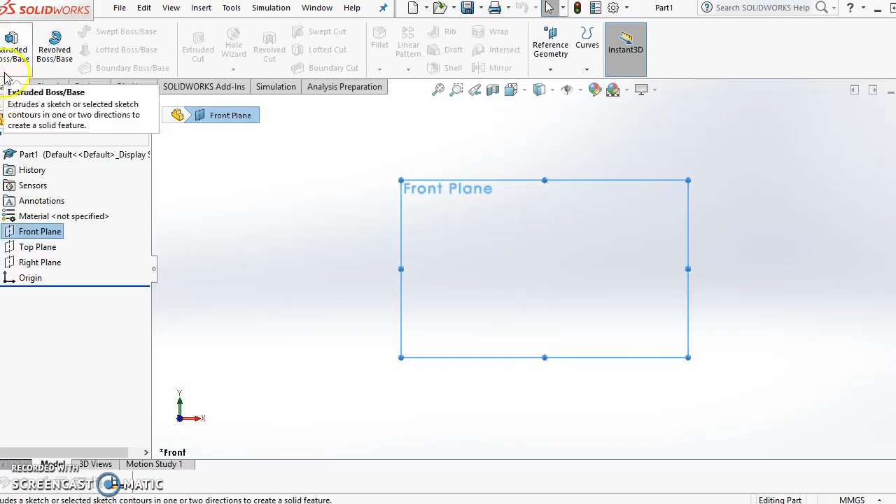Alright, so from this window we can just go straight into the front view. All the work we'll be doing in this tutorial will be using either the Features tab up in this top left corner or the Sketches. So both of those tabs we'll be using.

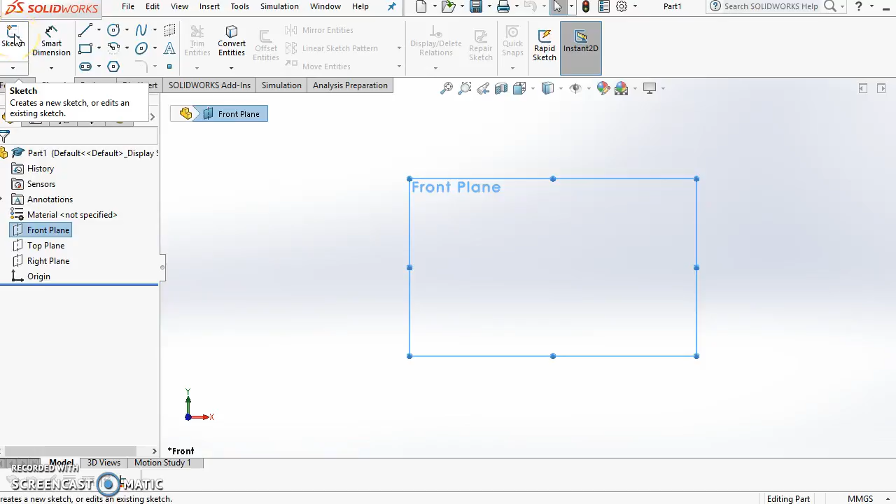So to start off with, just select the Sketch tab and then click on the sketch icon. And we're going to start off drawing a rectangle. So click on the rectangle and point your pencil in the middle there, and then we can just sketch a rectangle. It doesn't matter of the size at this stage, and let it go.

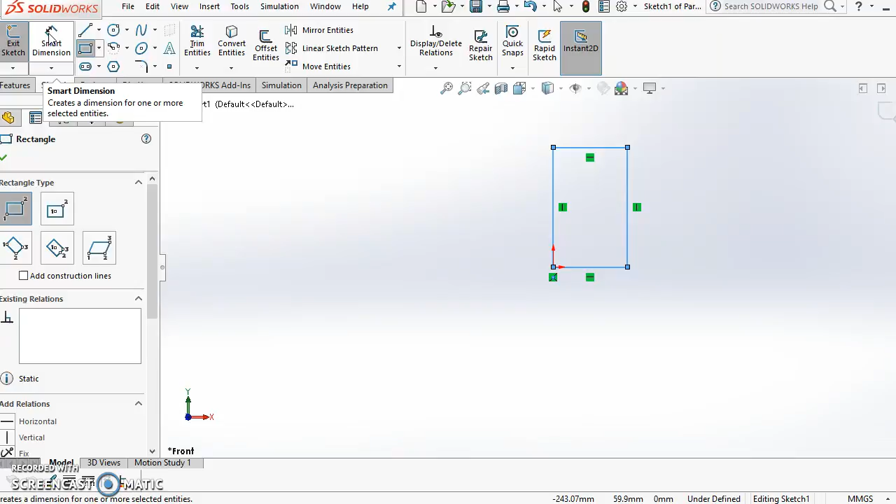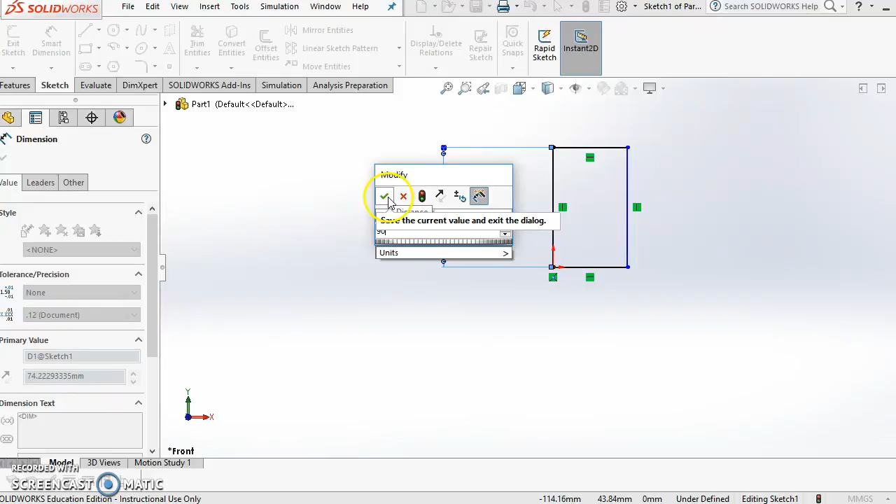And now if I select the Smart Dimension and start adding some dimensions for the sides. So first off, once that side is on orange color, I'm just going to click on it, and then I can just drag it out, click again, and this dimension here from our tutorial is 90. I'll put in 90, and I can either click enter or click on the green button, tick.

And same process again on this side. I just click on the line, drag it down, click again, and this dimension is 38, and enter.

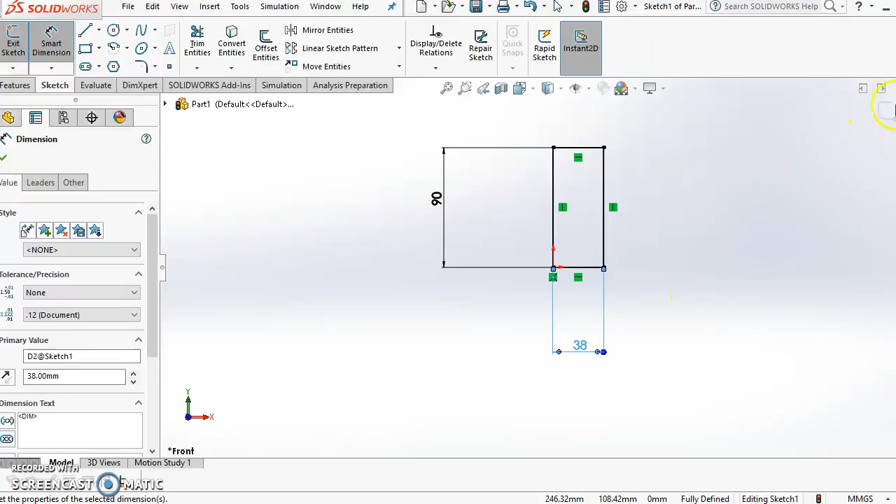Okay, so there's a little icon on the right over here. Just click on that to confirm. And if you want to have an up-close look of your rectangle, if you click on this icon here, zoom to fit, there's our rectangle to start off with.

Okay, so from the Features tab, what we're going to do is just extrude a little bit of it. So click on this extrude, and by default, if we have a look in this window here, it's set to 10 millimeters.

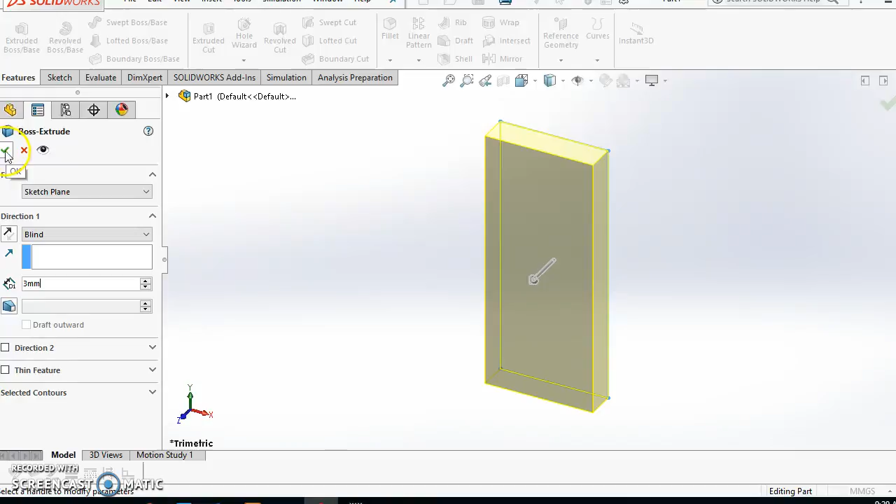Now from our workbook tutorial, it's 3 millimeters. So if I just put 3 in there, and by default I know this is set to millimeters, but you can just select down on the units and select millimeters, and up in here there's a little tick box, so I'll just tick that, and if I just tick anywhere on here, you'll see that now I've got a 3 millimeter extruded side there.

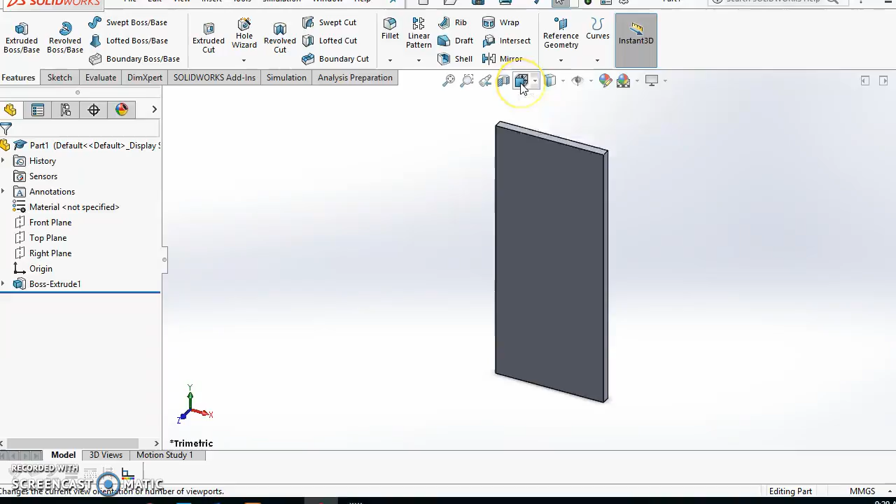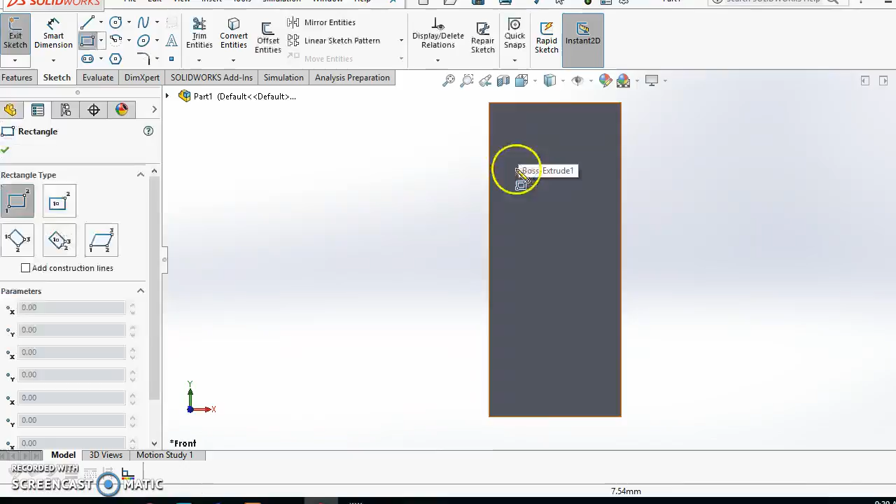Okay, so the next stage is from our view orientation and selecting the front view, and going and selecting the sketch again. We're going to create the window. So sketch, rectangle again, and inside this rectangle I'm just going to draw another rectangle. Doesn't matter of the size at this stage.

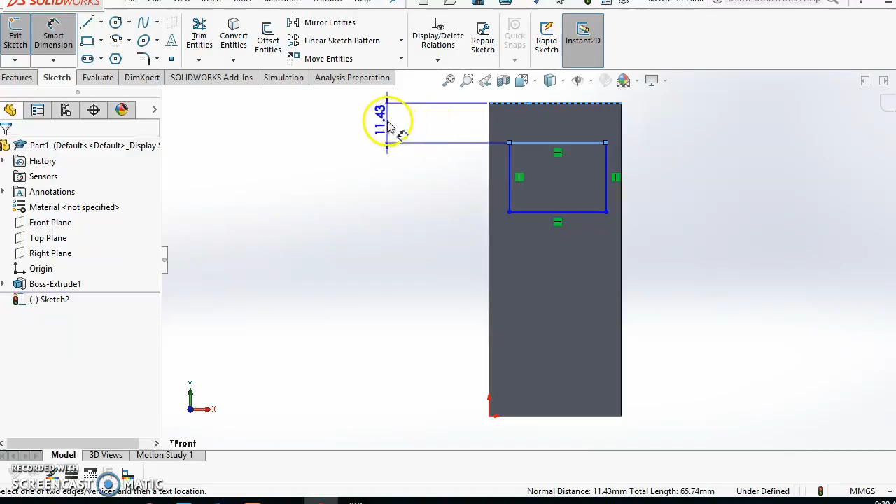And same process, we need to set our dimensions for it. So I'm going to click on there, Smart Dimensions, and to start off with, I'm going to set the gap between the top of the rectangle and this top of the side of this other rectangle. So I'll just click on the top here, and the top there, and straight away I get this. I can drag this out and set that dimension, which is 5. Put 5 in there, tick that.

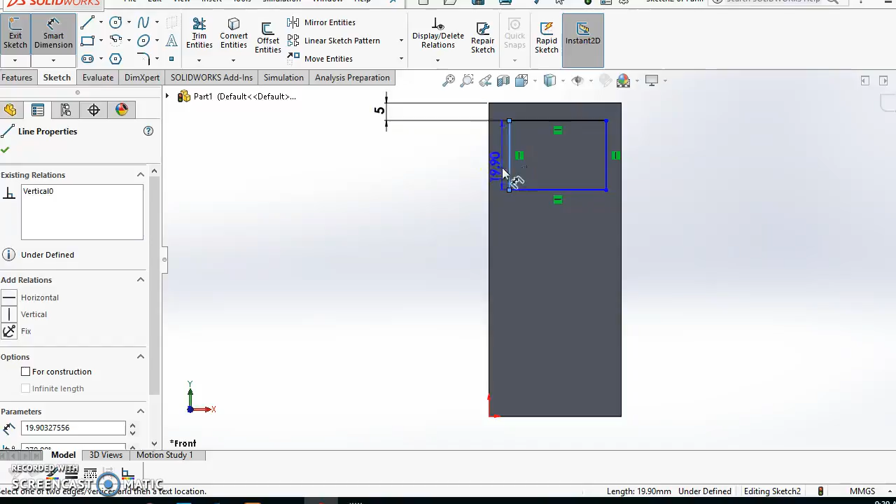And same process, I'm going to set the gap between this side of the rectangle and the outside edge of the rectangle. So click on this edge, click on that one, and now I could drag this down, or I could drag it up, but I'm going to drag it down. Click on it again, and that is 4 millimeters. So if I put in 4, hit enter, and now I'm going to set these side dimensions of this rectangle.

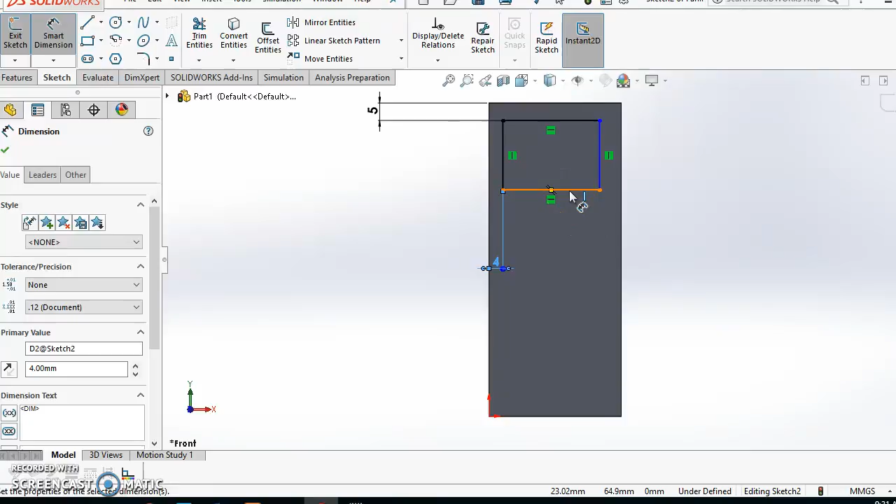So to start off, I just click on this one, drag it down, and this dimension is 30. And same with this side here, click on that side and drag it out, and this dimension is 45.

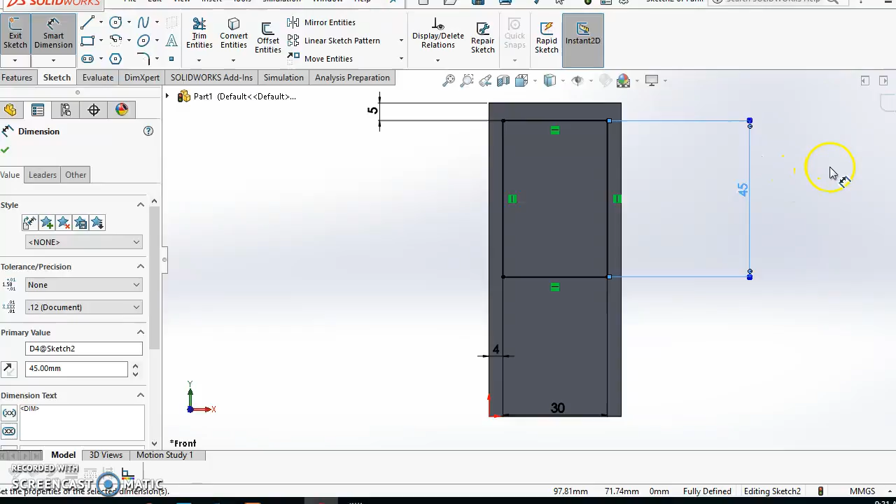All right, so everything looks okay with our dimensions. I'm just going to select this one again, and then we have our rectangle.

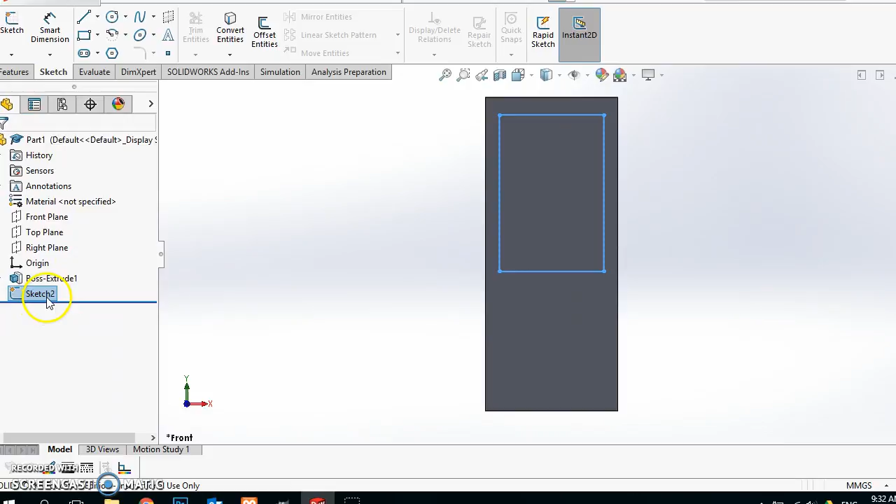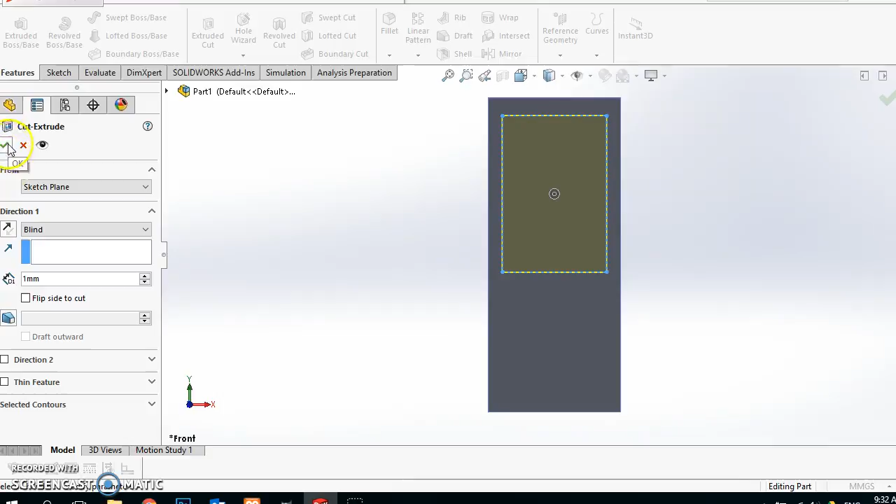So we want to give it a dimension as well with the cut. If you see in the window here, it's already selected, so if we go to the Features tab and click Extrude Cut, by default it's 3 millimeters. I want to change that to 1, select millimeters, and I'll just drag this across. So for this tick box, I'm going to click OK. Now if I have a look at what I've just done, from View Orientation I select Isometric, and if I just click over here, you can see that now it's been cut inside that rectangle and gives it a bit of depth.

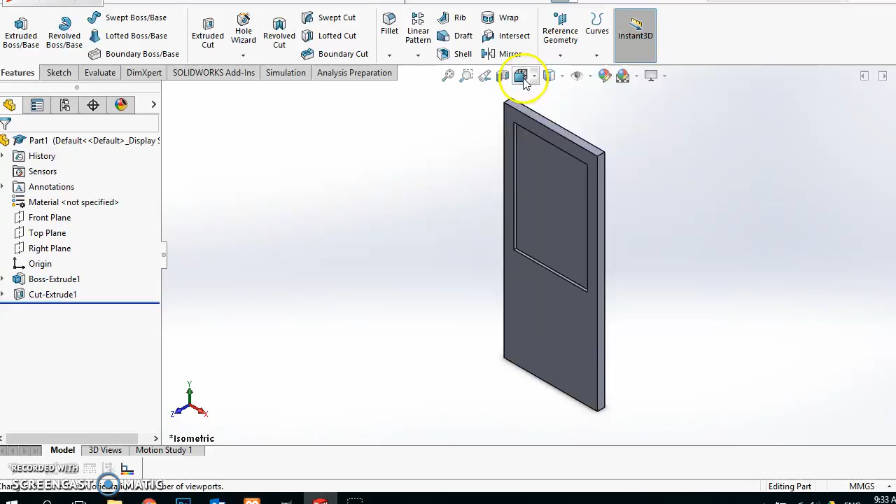So the next thing we're going to do is repeat that same process, but we're going to put in a circle down here. I'll just change the view back to front view, back up the sketch, select the sketch and the circle, and just draw a circle in here, doesn't matter the size for now.

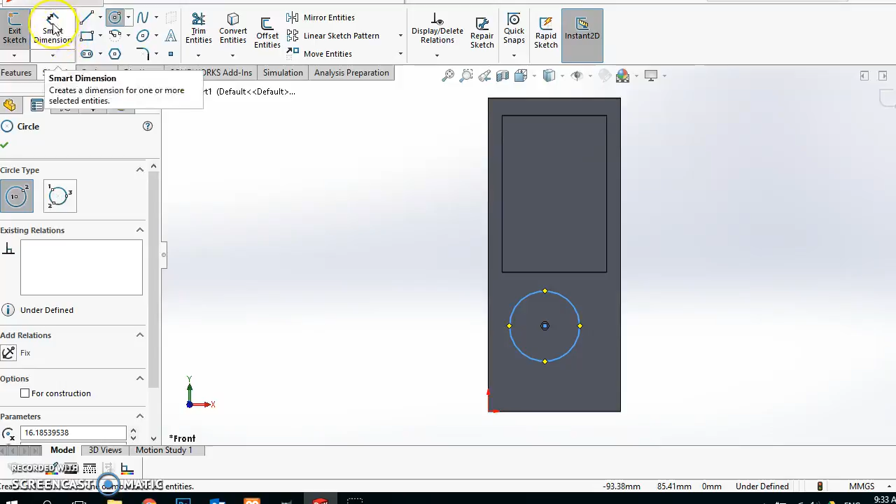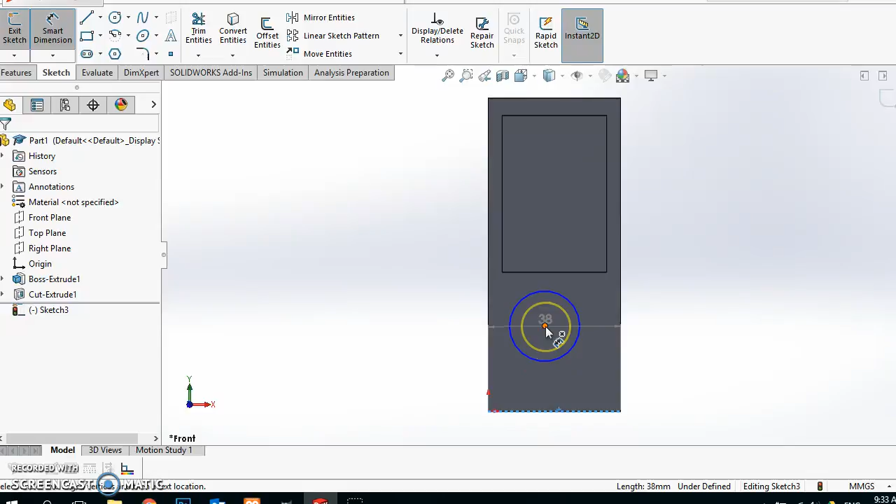Okay, so I'm going to select Smart Dimension again. To get the circle into the position we want it, it's a similar process I used when setting up the rectangle. So I'm going to click on this bottom side, then click on the middle dot, and then drag this out, and the measurement is 20. And similar thing here, I'm going to click on this side, click on the middle dot, and this measurement is 19.

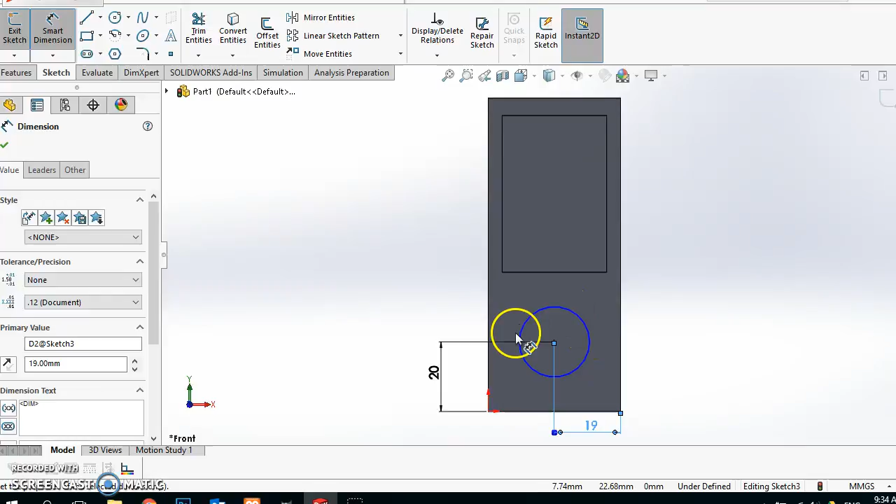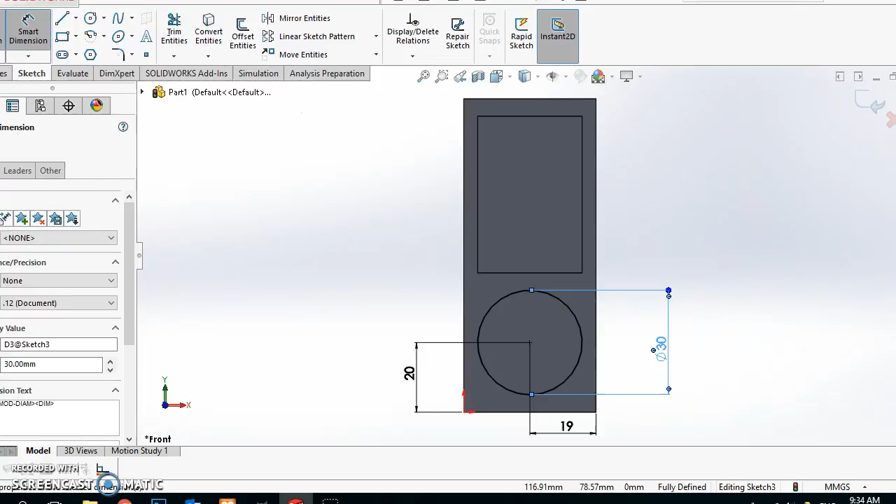Okay, so to set the diameter of the circle, I just click on the side and drag it out. You can either go diagonal or either one's fine, they do the same thing. Click on again, and this measurement is 30. I'm all happy with that, so I can click on either the green tick there or in this top right corner to save those dimensions.

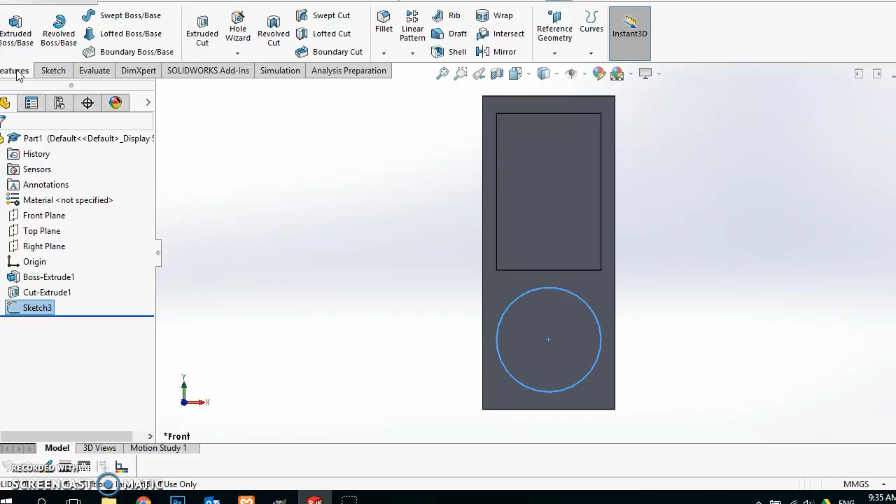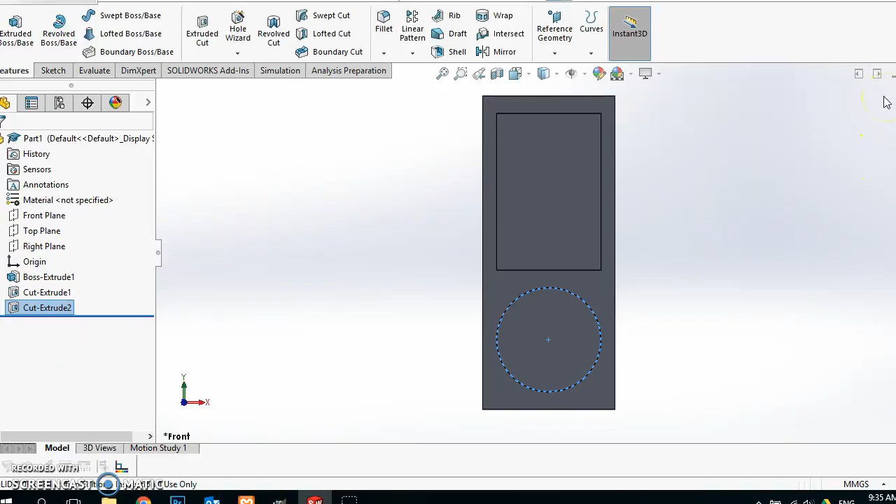So once again, we're going to cut a depth inside for the circle. Back to Features, Extrude Cut, and we've already got the 1 millimeter set from the last extrusion I did. So if I just tick it, and change the view again to isometric, if I just click over here on the right hand side, we can see now we've got an extruded cut.

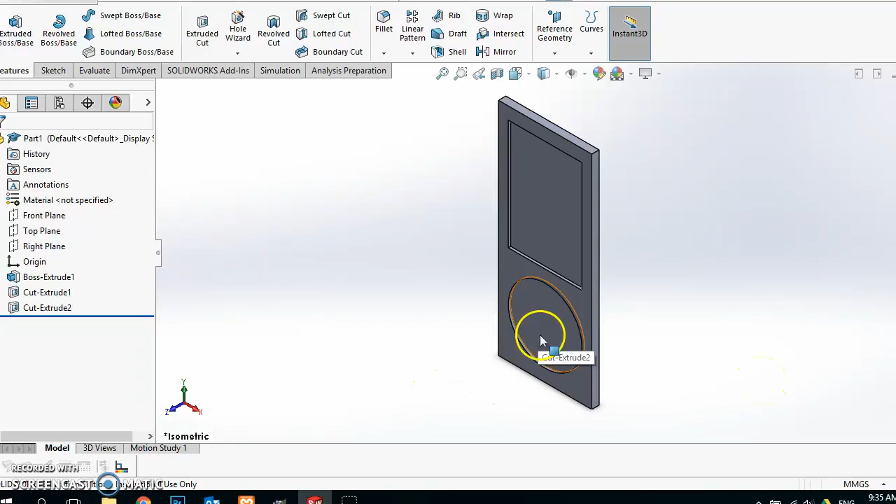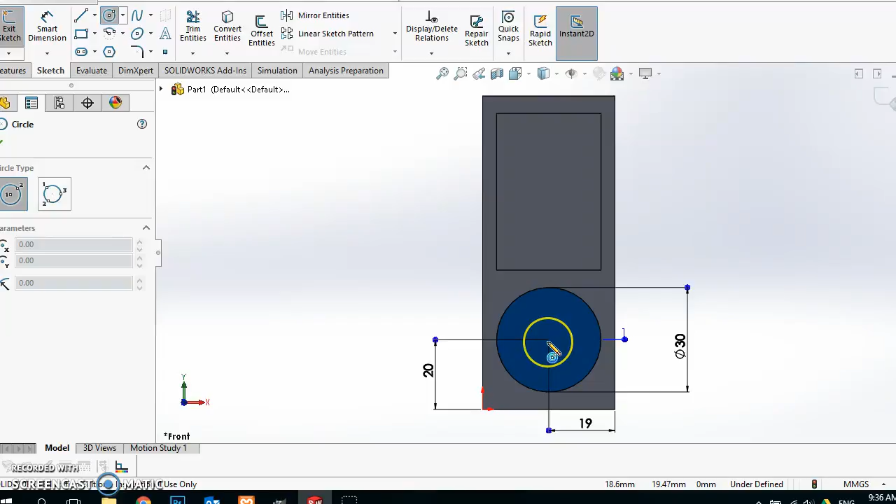So the next part is to put another smaller circle inside here and extrude that. Back to front view, and sketch, selecting sketch, circle, and I'm just going to draw a circle in there.

Okay, so smart dimension, and this smaller circle, the dimension for that is 12. Click on there, pretty close, 12.51. Click on it again and just change it to 12 and tick that. Now, I already know that's in the middle, in the center, so I don't need to change any dimensions for that.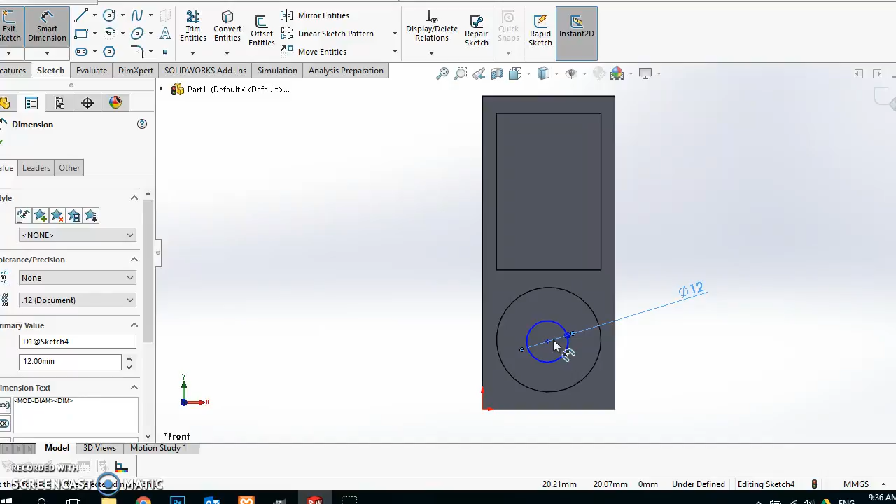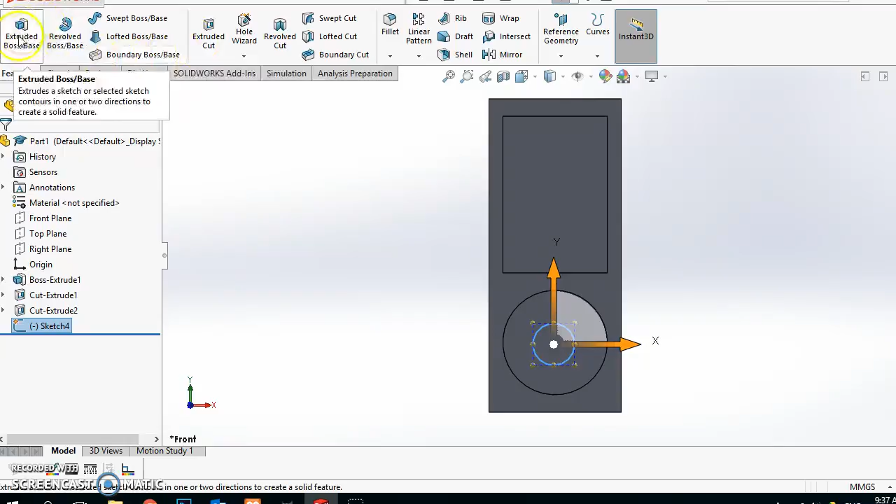So once again, I'm going to extrude that out. Click our confirm, go back to the Features tab, and I'm going to select this Extrude Boss Base, and that is already set to 1 millimeter, which is what we want. Now if I just click OK and change the view again to isometric, you will see this loaded.

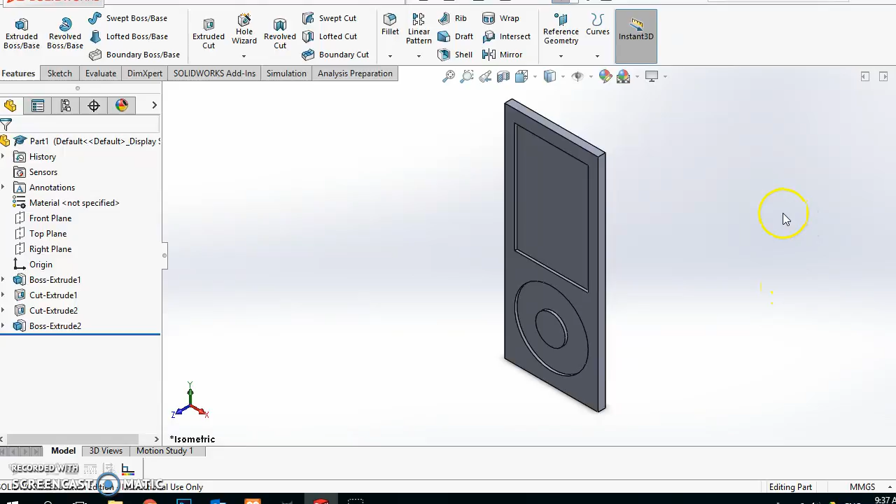I'm just going to stop the video now, and then I'll come back with how we're going to finish off our iPod Nano.